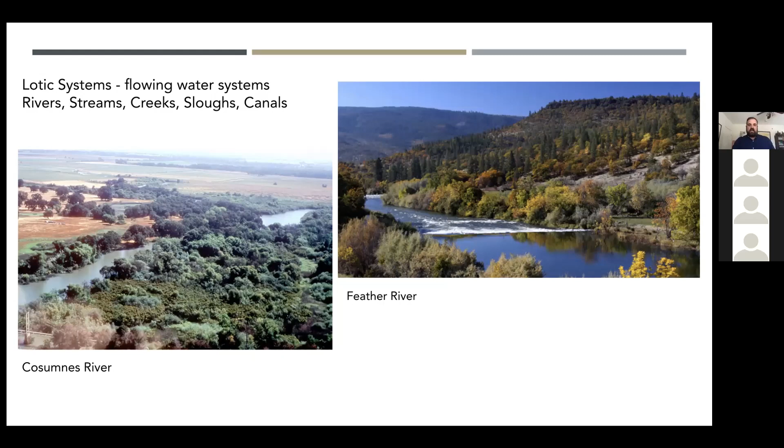The reason why that's important is as you have these different rivers flowing, your parameters may be a lot different. So just understanding the water tends to be cleaner up in the headwaters, and then becomes more turbid and slower, with a lot more suspended particulates in the actual river or creek. So even a canal or a ditch is still considered lotic because the water flows. A lot of people that work in this industry would be dealing with those as well.

A lentic system is typically something that doesn't have any flowing water - still water, like Lake Tahoe, reservoirs, ponds, marshes, things that don't flow.

The issue with those when it comes to water quality is if they are receiving a bunch of nutrients, they can become eutrophic and change the water quality from a low nutrient, or oligotrophic, system into a eutrophic system, which is a heavy loaded area that can actually become very toxic. I believe there's a lake up in Northern California called Clear Lake that gets so much nutrient load it becomes really the not-so-clear lake because of all the nutrients. So these systems act differently.

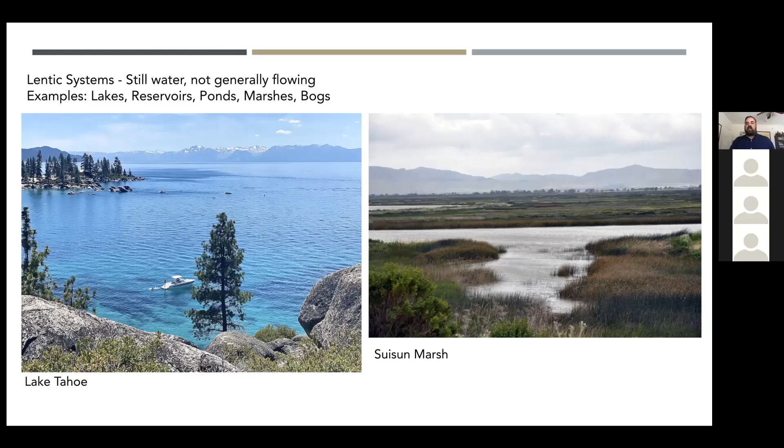If you have a marsh and you're trying to work through that, and turbidity, and you're disturbing the soil there, the turbidity is not going to flow away like, say, in a moving creek or river. So, like I said in the beginning, we wanted to make sure.

I wanted to highlight some of the wildlife that occurs there, especially some that are sensitive. So this right here is the steelhead trout. It's a species of special concern. Some runs of them are actually endangered. These white lips are the main feature, that's how you can really tell it's a steelhead trout. So they are a salmon, actually in the Salmonidae family, but those white lips really give it away. And they're in these rivers and streams, and they do spawning.

So the steelhead trout, for those who don't know, are anadromous fish, just like a Chinook salmon or a king salmon. They're born in the headwaters and rivers and creeks, and then they flow out to the ocean as they get larger and have the opportunity. They get very large and come up the rivers again and breed, and can live their lives. So it's basically a rainbow trout that is adapted to go back and forth into salt water, and they can actually go back and forth several times. They're not necessarily like a Chinook salmon, where breeding is the end of their life cycle.

For these guys it's important to have high water quality for spawning, and also temperature. So temperature, pH, these different parameters could affect the eggs when they're breeding.

Our largest native frog, the California red-legged frog, another species listed as threatened on the federal and endangered species list. What's important for water quality for these guys is amphibians are highly sensitive to toxins in the water because they actually absorb all their nutrients and water through their skin. So amphibians don't drink any water, they just absorb everything through their skin. So if there's any toxins, or if pH changes to acidic or too basic, you can have a lot of issues, and the populations of these species will diminish.

And then the foothill yellow-legged frog, which is found in the headwaters of the Yuba River and the Feather River in the Sierras, has just been listed on the state endangered species list, and they need very clear water. So affecting the water with turbidity or changing the water chemistry could really affect these populations.

Coupled with a lot of the permits that people get for different projects or agencies, a lot of these animals are tied into that, for these reasons - because they're listed and sensitive, and so there's a lot of language in there.

Then going to the reptiles, the western pond turtle, another species of special concern, another sensitive species by the state. Certain populations of them are being reviewed as a candidate for endangered species status. So these guys have also been in decline.

And then of course you have the mammals - river otters and beavers that are kind of more on top of the food chain, which are really important for the health of our rivers and also indicators that the river has a nice food web there.

So I just wanted to make sure we talked about this, one of the big reasons why some of these permits exist - you have the 1600 permit from the California Department of Fish and Wildlife, or if there's an endangered species, the United States Fish and Wildlife Service, and if there are fish like the steelhead trout and salmon, you'll have NOAA's National Marine Fisheries Service involved with your permits. Understanding that they're important, these agencies exist to protect all of these species, and their goal is to help them recover.

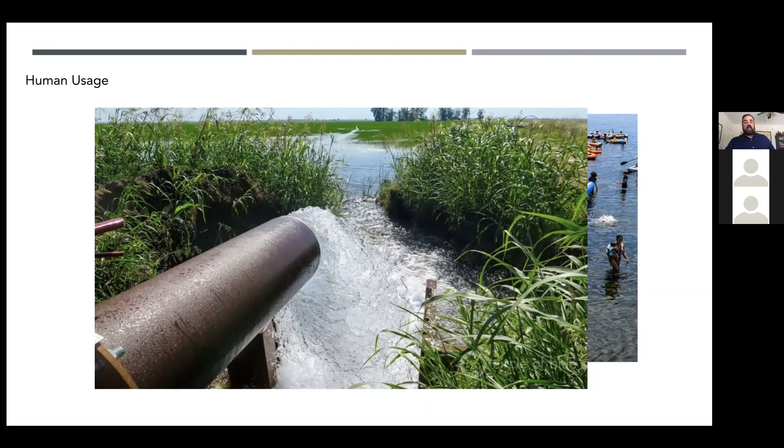Then, of course, agriculture. So this is a photo of a rice field being filled, because rice needs a lot of water during the summertime so that it can grow, a lot of sunlight, and we produce a lot of rice in California for the world. So it takes a lot of water.

So about 91% of wetlands in California have been lost or altered, due to draining, making aqueducts, channelization, and just draining for development. So we've lost a lot of that habitat.

And since we've lost that, that's why there's so many species tied to these wetland and riparian areas that are endangered. Losing 90% of your home range, these species and the whole system get into big trouble. And hence, that's why we have a lot of regulations to ensure that we are protecting our water resources, for drinking water and for wildlife and ecosystems.

Of course, that goes hand in hand. That is a big balance there.

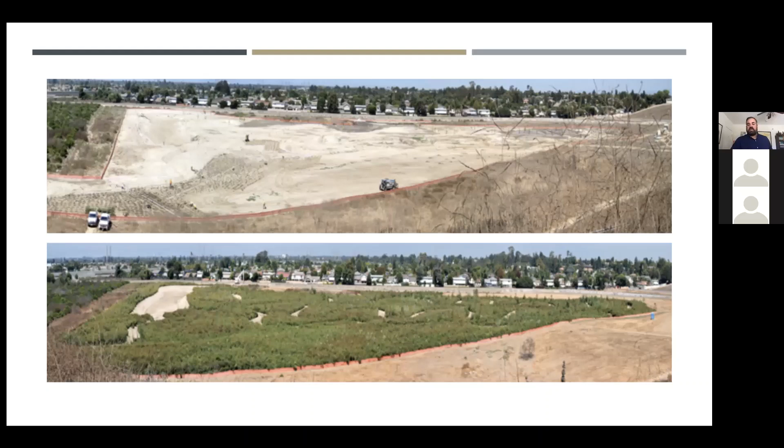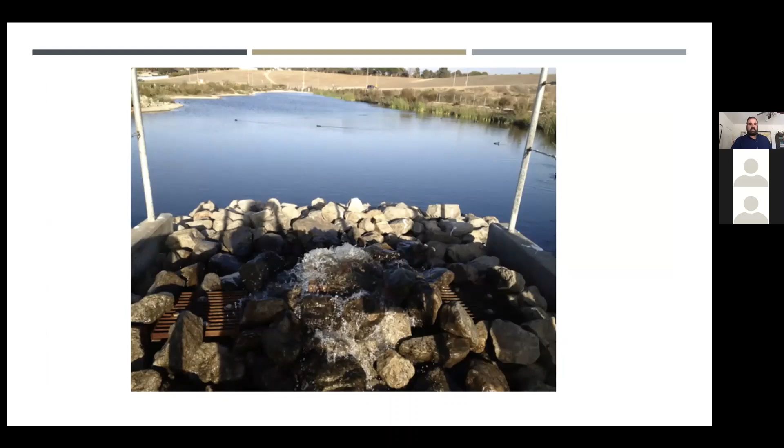So when we do construction of wetlands - thankfully this was the first project I ever did. Back when I started the company, I was a very confident 27-year-old who designed this, and I probably would do it a lot differently now, but I had the opportunity and still manage this project where it was just a dirt field, and we constructed 40 acres of wetland and riparian system down in Orange County. And this water is actually just urban runoff that we're utilizing into 6 acres of true wetland habitat.

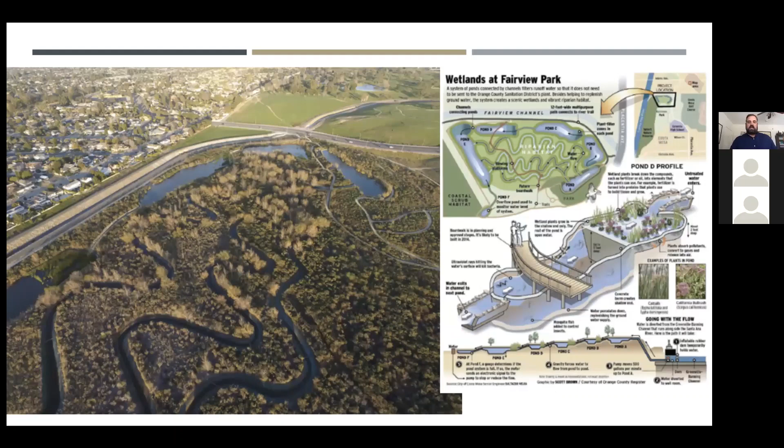And it filters down and goes back into the groundwater. So understanding these water resources, restoration, and manipulating them so that we can use them for agriculture, drinking water, recreation, and even restoration - it's all in this big cycle and balance. So that's the end of the wetlands component.

I wanted to make sure we talked about that, and then we'll talk about our in-water work and diversions for our projects. These projects are all transportation related, either through Caltrans or counties, bridge replacements or widening. So as we go through this, we'll show a few different diversions and how they actually regulate water quality.

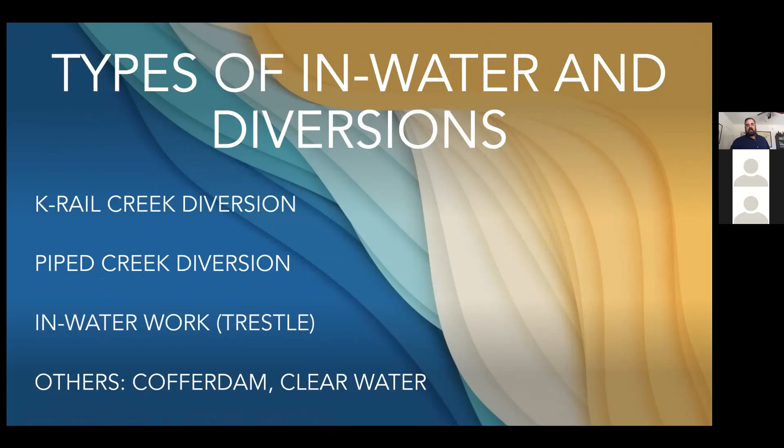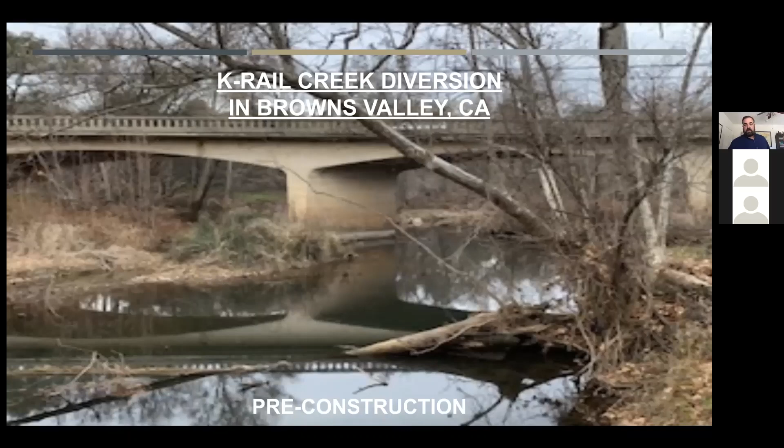So this is Dry Creek in Browns Valley up north, and this is Highway 20 - the Highway 20 bridge, and this bridge is going to be replaced. In order for them to do that, they needed to have a diversion in this creek to have access. However, there are steelhead and salmon known to be in this creek, so they have to allow fish passage throughout the life of this construction project.

So here's some different slides of putting the K-rail in. To be able to work for longer periods, they put in this permanent, semi-permanent structure, more of a hard structure since K-rail is very strong. We were able to put this into Dry Creek and temporarily narrow the passage to still allow for fish, then put native rock behind the K-rail and filled it.

As we were doing that, we were measuring the turbidity upstream and downstream of the system, and also ensuring that there was nothing, no debris or anything coming out of the site.

As we were putting the K-rail in, our biological team was seining out the wildlife that would be trapped by this K-rail barrier. On the left slide, it's not an excavator exactly, but it has a hook on it for putting these down. You can see there's a little path of water that wildlife can get blocked in, so we seined those out and removed some small fish, crayfish, and bullfrogs, which aren't really native, but it showed there was wildlife there.

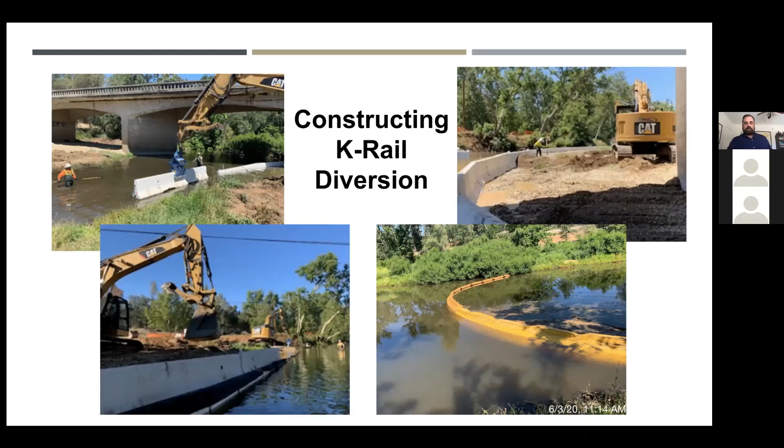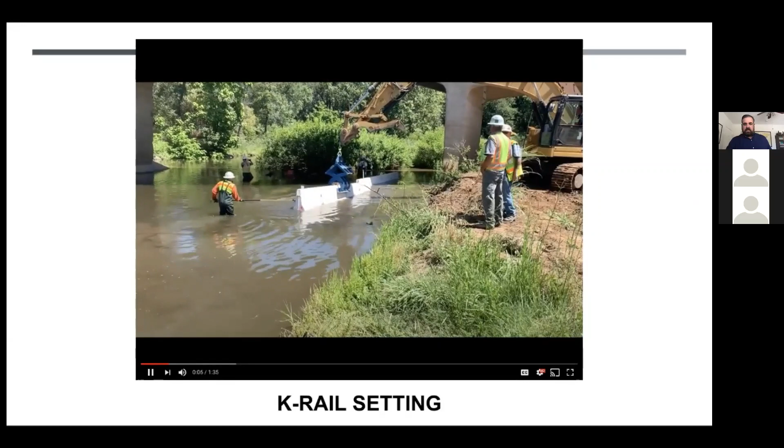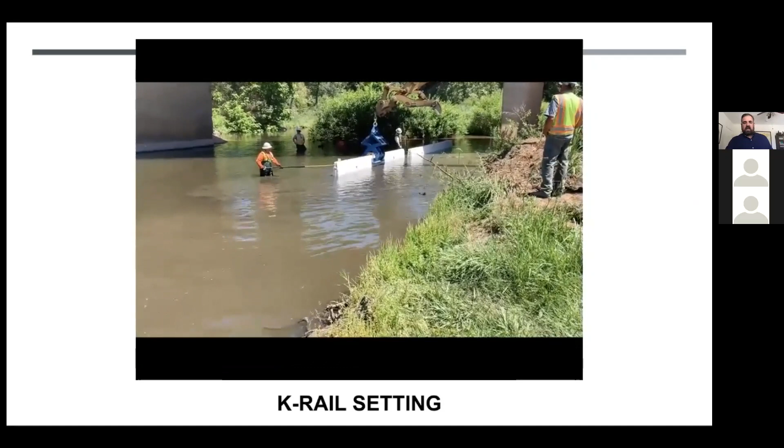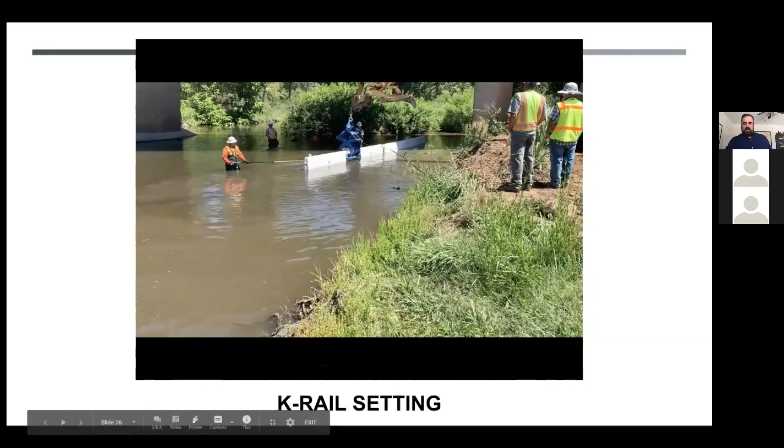So this is kind of like getting out of the way. Sampling. Wanted to show that, I don't think we have to watch the whole thing, just kind of know what's happening.

So this is kind of the finished product here. You still have this passage so fish and wildlife can move through the construction project, and there's still access here to build the new bridge coming out in the foreground of this photo. If we're looking at the bridge, that is upstream, and the viewpoint is downstream. The photo on the right is under the bridge looking downstream.

Water remains pretty clean, no erosion going through, and this also enables higher flows. It's not going to create any more erosion because the K-rails are a solid structure.

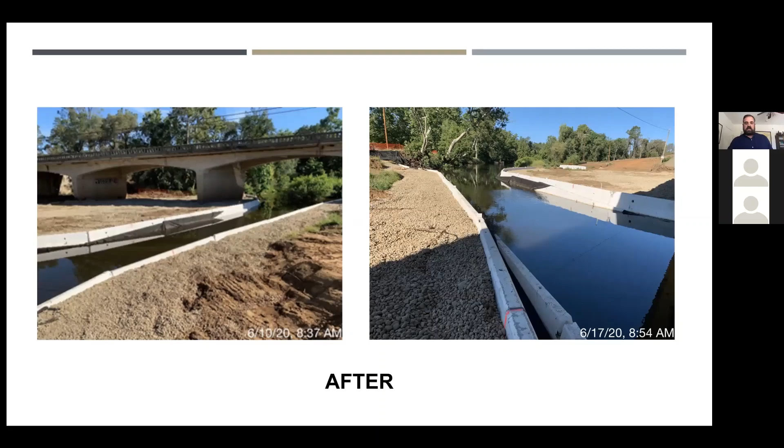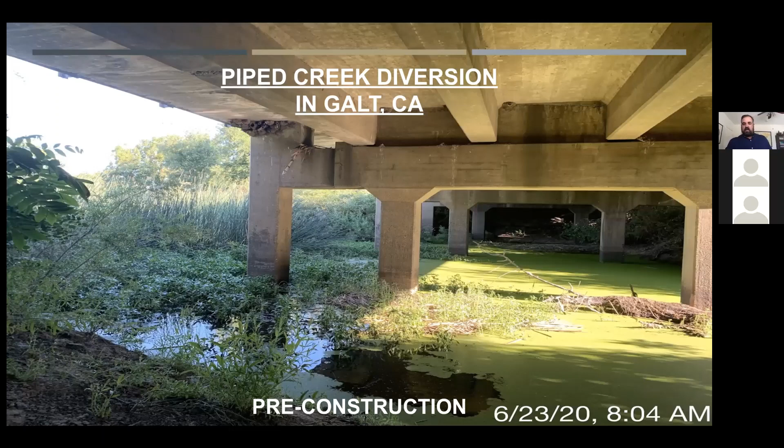This area actually didn't have a lot of flow - it was very, very low, if not any. However, it's still connected to irrigation, and even though this system isn't necessarily completely natural - I'd say Deep Creek, the last example, has a little bit more natural flow - the irrigation districts and farmers can really affect how the water flows, almost unseasonably.

So for this one, they used a black plastic pipe, about 12 or 14 inches, and put that in the creek, dewatered the area around it, removed any wildlife, and then it was buried there on the right.

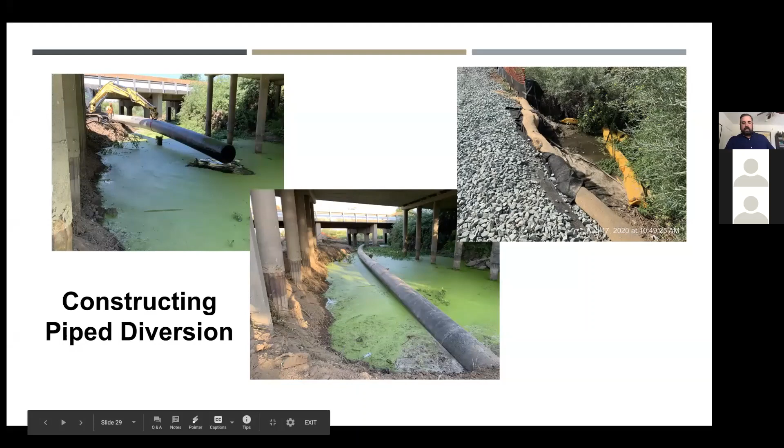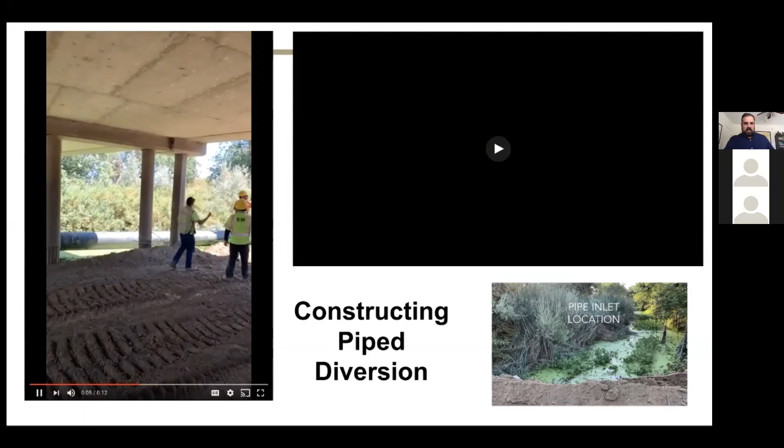I'll show you some videos here. Another one laid it in there.

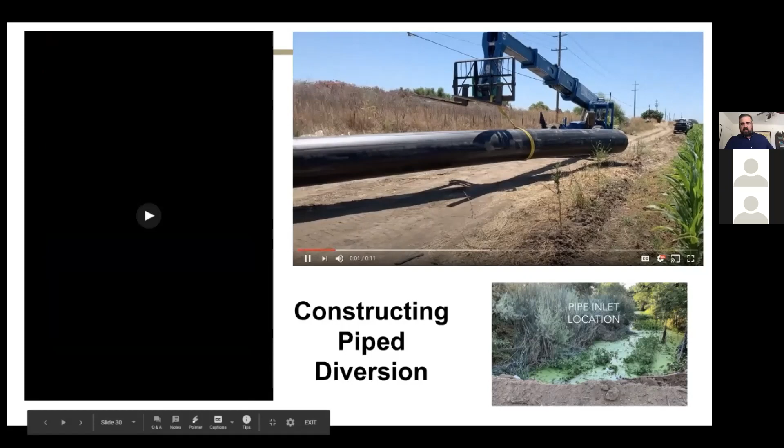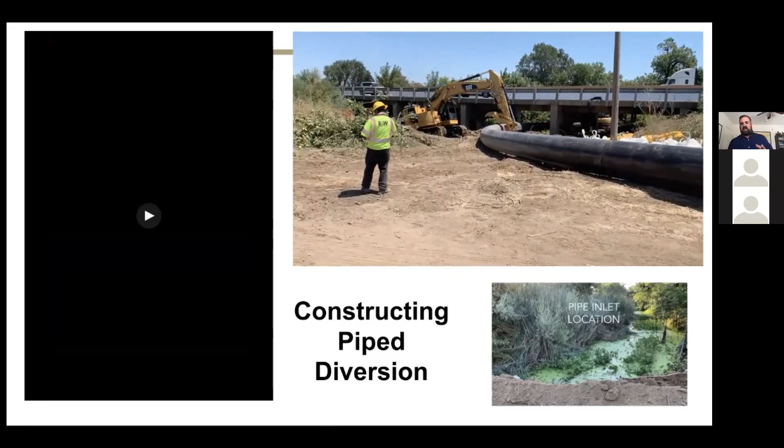The project is actually under Highway 99 - that was probably the northbound bridge there. Let me move this display. You can see this is the pipe inlet up here, down in the right corner, so this is the upstream component.

You can see the water is actually not really flowing, it's barely a trickle, but there are times when the irrigation from the upstream agricultural areas plays a larger role.

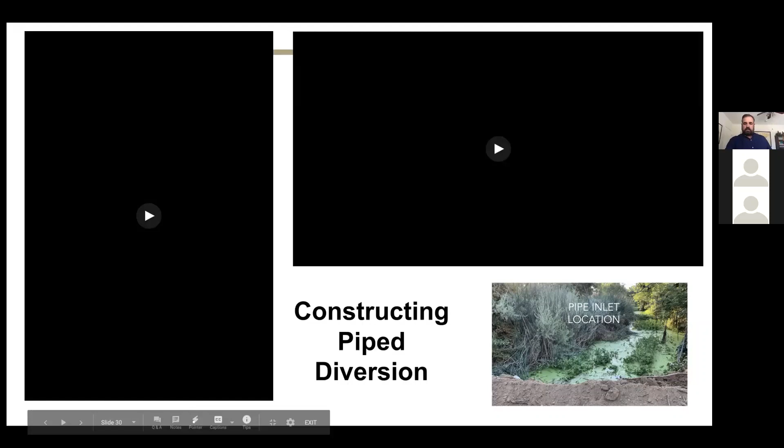This project has daily testing to ensure compliance during this rapid construction. In the Sacramento area, there's a lot of rivers and a lot of construction that is this rapid seasonal construction that has to be done before certain dates based on permits. It could be because of the flow of water, or in this case, the giant garter snake, which starts to go underground in October, so you really can't work past that date without the potential of impacting them during construction.

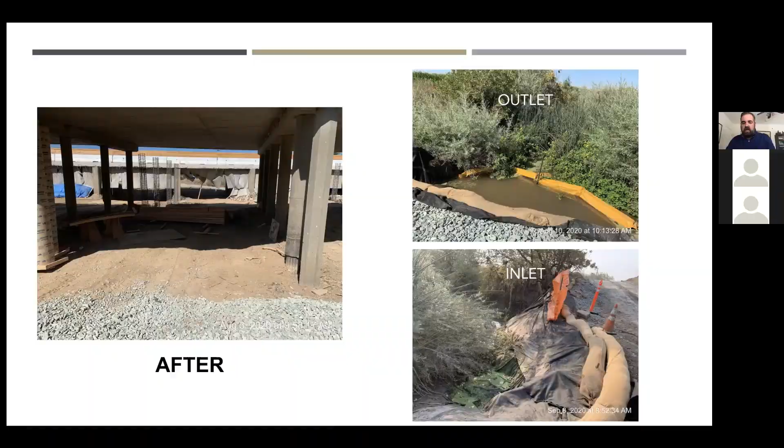So this third one, this in-water work here, is at the American River. The bridge is Highway 160. It's actually still connected with the Caltrans project 99. So it's interesting that there's one permit for two different locations and two different watersheds. I've never really seen that before. It's pretty interesting. So anyway, this is Highway 160, just north of Sacramento. Kind of, it's in Sacramento, but the north end.

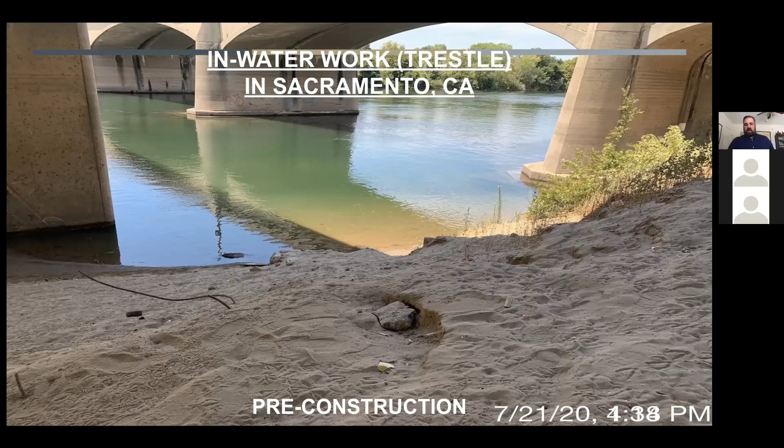American River, and it's a scouring project, so to protect against further scouring of the bridges here. So this work is all in-water work. So putting up the turbidity curtains, they're creating these coffer dams, dewatering, and then they're going to be pouring rock kind of around the pier walls here to ensure that to protect against further scouring.

So they had to build a trestle because you had to get to each pier wall to get this excavator out there, and then there was also barges and everything.

And so this river, you know, a lot of creeks and everything, when you're doing water testing, you can just kind of walk up or get like a long, you know, kind of a dip cup and just grab that water sample. Since this is a little bit bigger of a system, you know, you got to have a boat or different methods. So even if your boat breaks down or you don't have access, especially this year with COVID, it's even a bigger challenge.

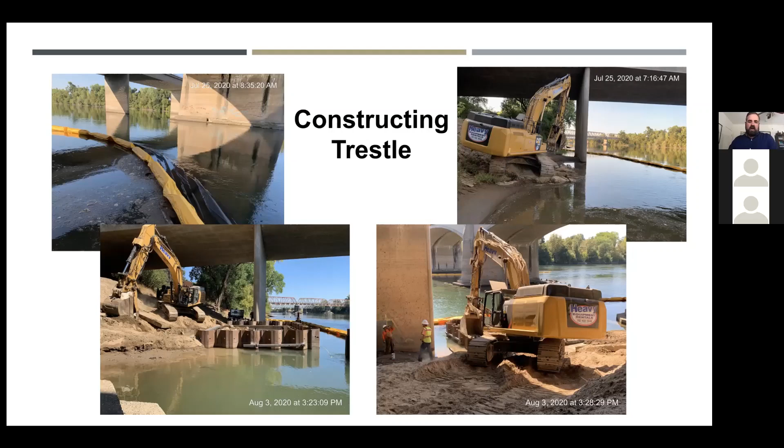And sometimes we utilize the watercraft that the general contractor already has on site. So due to COVID, we weren't allowed to do that without a little bit more testing and things, which could slow down the process since we have to be testing the water here on a daily basis. So we came up with different methods, which I'll talk about in a minute.

So here's the after of the trestle bridge here that they put in, and then you have these turbidity curtains to ensure that the project is minimizing that turbidity to the main river there.

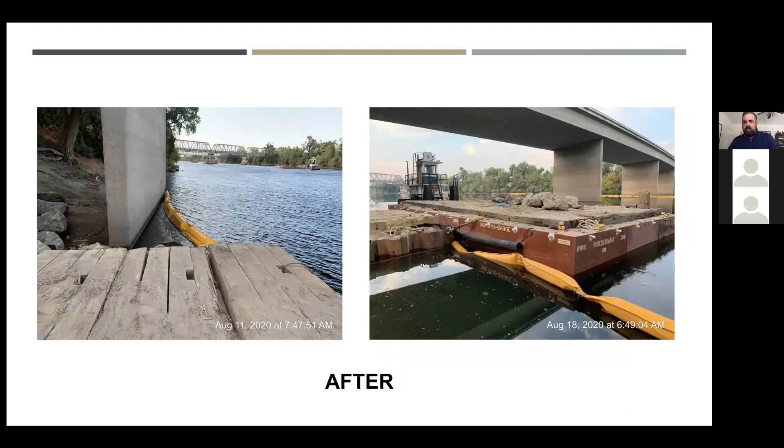So, you know, as you're doing in-water work, of course, sampling is a big part of that. Whenever diverting or just impacting the water within the water work, making a trestle bridge or whatever, we have to ensure that the turbidity isn't breaking any thresholds, and the pH, if there's any concrete work or anything else going into the water, isn't affected.

One other thing worth mentioning is dissolved oxygen, which is really important, especially with these rivers that have fish. When you have turbidity, it can block light, which could then affect the photosynthesis process, which could actually affect dissolved oxygen. In worst case scenarios, especially with heat waves that we've had this summer, you could actually experience fish kills, which obviously wouldn't be looking good for any project, whether it's related or not.

Nobody wants to see floating salmon or trout. So we had different methods here, at Dry Creek and the American River, just kind of showing different ways to do this.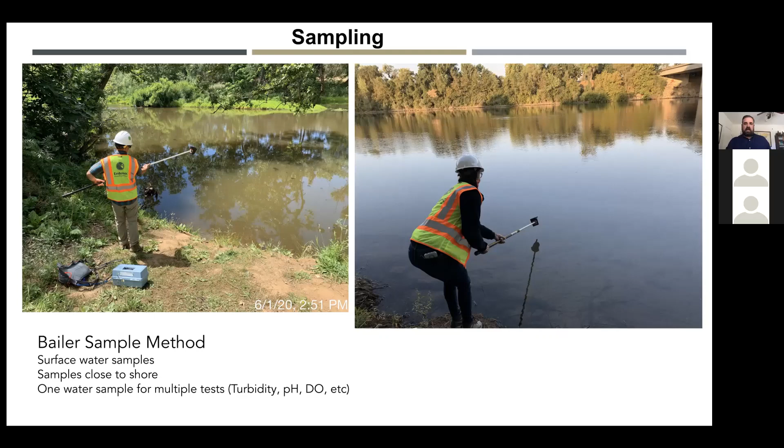So actually the fishing pole method, that was good, since Cheyenne here is a really good caster. She's getting great samples from the middle. So when we didn't have access to a boat from the contractor and our boat was being utilized in another area, we still wanted to make sure that we get our samples.

So I guess she could have gone out in an inner tube or something and floated out there and done it, but this is a way that has actually been quite effective to get these samples. So getting the turbidity and pH. Obviously in a sample like this, you can't really get an accurate dissolved oxygen measurement.

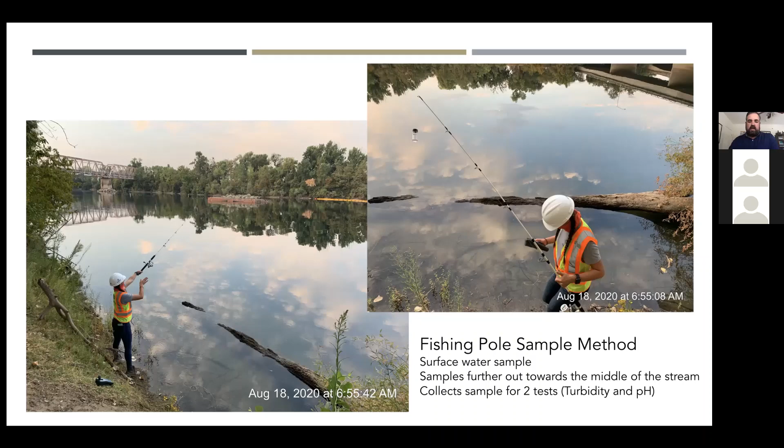That has to be done in the water with a probe. So then of course, when the boat is working or we do have access to it, you get out in the middle and make sure wherever the work is being done, you can get closer for more accurate samples of what's happening.

Also, in these bigger systems, when you're looking at this turbidity curtain, you can see that debris can really build up. And I think that's something to look out for.

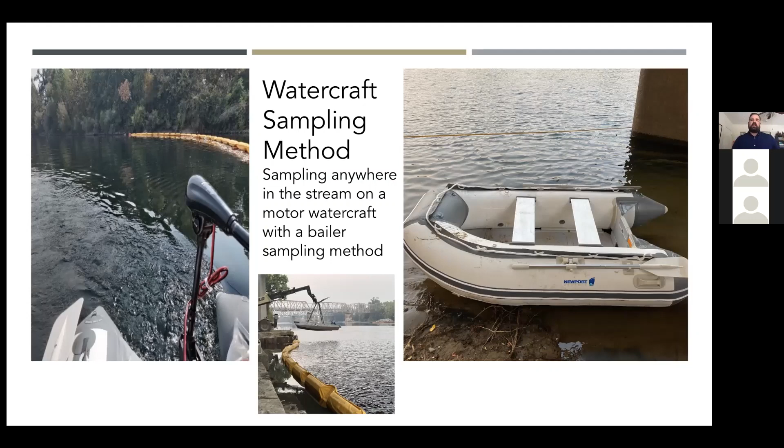Especially the American River has a lot of people using it. There's a homeless community there, and so there can be a lot of trash, and this thing is flowing all summer long. So you've got to watch this in case this is moved or anything, that it doesn't flow off the project site. It could be debris from the project as well.

So I kind of touched on a little bit of this. What is turbidity? The measure of turbidity is really the clarity of water in the NTU unit, which I'm sure all of you guys know. And from a biological component, it's extremely important because if water becomes too turbid and the system isn't supposed to be, it can really affect the species that are photosynthesizing. It can actually cause health issues.

So UV light kills coliform bacteria. So if that is being blocked by higher turbidity, you can actually get an increase in coliform bacteria, which can be an issue. If that's an issue, it becomes a health issue. It affects the people around it, off project, and it can be a news story that nobody wants to be a part of.

So along with it affecting the natural balance with the fish and amphibians and things that breathe underwater, it can also cause a health risk for people in drinking water.

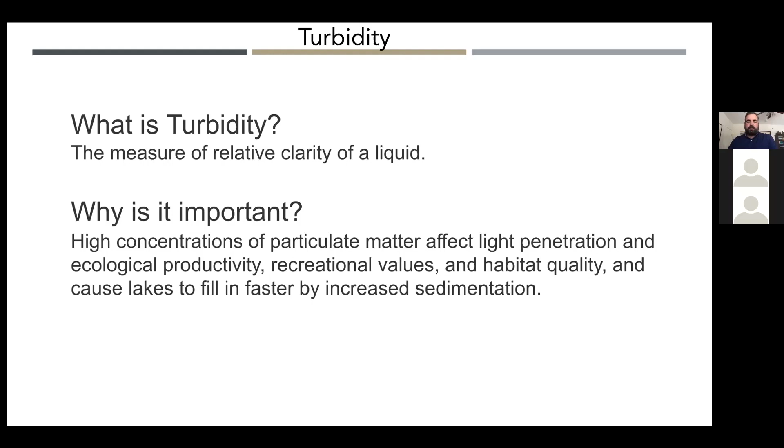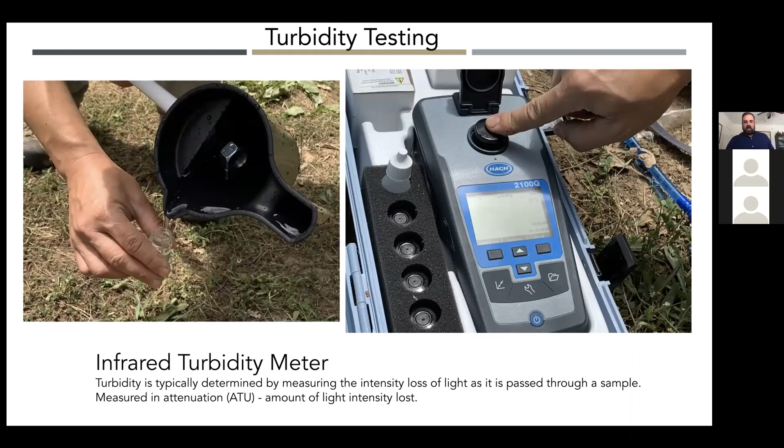So the samples, we're putting them in vials so that we can actually put them in the turbidity meter and ensure that we get an accurate reading, making sure that those readings are within the permit levels, so that they can continue working, or if there's an issue, we need to stop work and adjust or figure out what's going on.

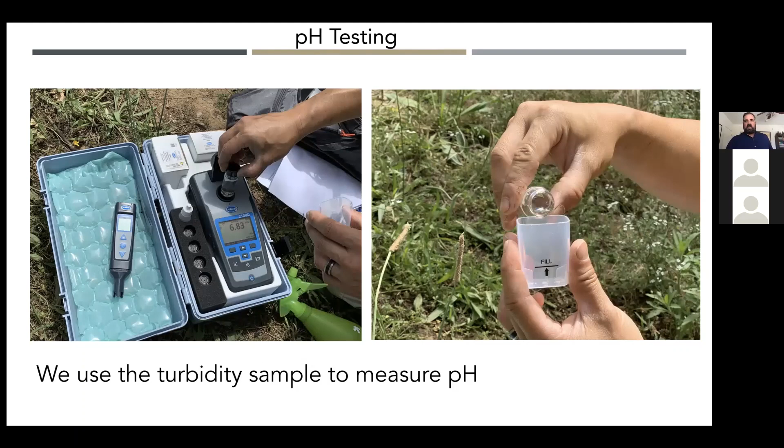So then you can also use that turbidity sample to measure pH. If it's going down, that's acidic, and if it's going up, it's basic. So if there's anything that could cause a change in pH, concrete, or if for some reason there's a bunch of surfactants or soap or something in the water, that could potentially change it as well.

So pH would be an indicator of certain chemicals in the water, like I was just talking about, and we don't want that to go too low or too high. pH is a measure of logarithmic units of hydrogen ions, either hydronium or hydroxide, depending on the concentration, which will tell you the pH number. So 10 to the power of negative 7 would be neutral, of course, and I know you guys all kind of know that.

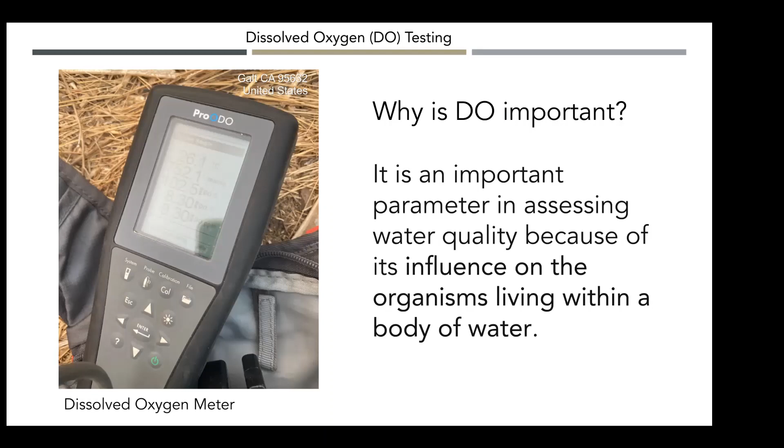So dissolved oxygen, I kind of mentioned that earlier as well. It's an important parameter because of how it influences aquatic wildlife. At this time of year, if there are small ponds or shallow water and it gets really hot, there are natural fish kills that happen. So with that already naturally happening, we could tip the scale if it's almost there, if for some reason turbidity is high, or we're impacting these water resources in a way that could exacerbate the situation.

Another area, obviously for water quality, you want to consider the surrounding areas, especially in the Sacramento Valley. There's a lot of agriculture, which means you're going to have different fluxes of water flows. There could obviously be chemicals in it, pesticides and whatnot.

These chemicals could also come from recreation, like oil slicks from 2-cycle engines and things like that, and from the larger river systems. Roads, of course, if there's car accidents and there's oil spills, or a truck spills some chemicals, that could all be washed into the area.

And then, of course, this year, for pretty much everybody in California, we've experienced a lot of smoke and fires, which, you know, we had internal discussions on how that ash affects the water and the water chemistry. My guess is since ash is used to make soap in an old way, it makes the pH kind of increase.

And then we had a team meeting with our fisheries biologist to see how that would affect salmon or anything like that, will we see any fish kills? So anyway, there's outer influences outside of our control that we just consider, because if all these things were happening, we still want to determine if we observe something occurring with water chemistry at the project site, whether it could be from other resources and not just from the project.

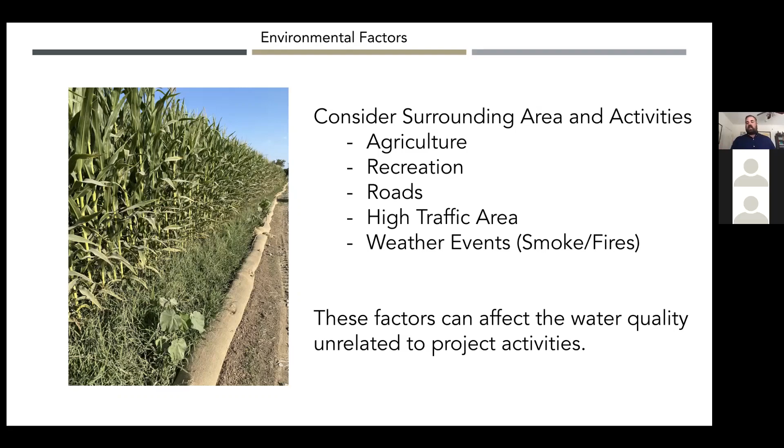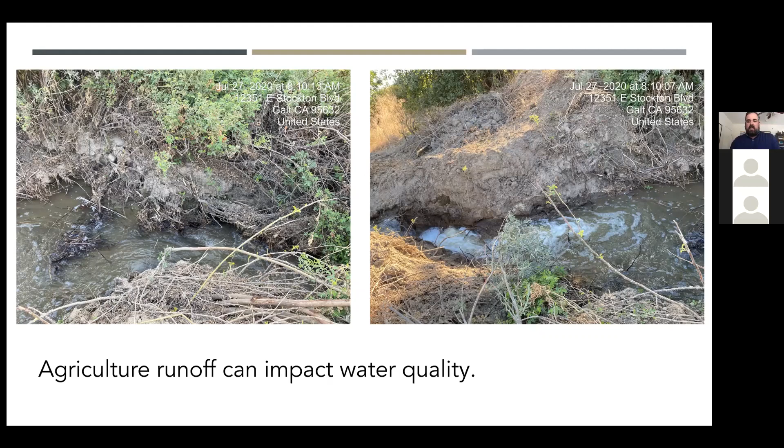Who knows if there's something in there like an oil spill a few inches down that then gets released. So that obviously can impact your site.

I'm sure a lot of you who work in the field know human activity can affect a lot of sites, from people just stealing stuff or breaking things for no reason or dumping things. So that obviously can impact water quality and the progress of the project. And actually, as a secondary thing, it could increase the work you have to do, which could increase the stress on the project as well, because of human activity like homeless encampments and everything.

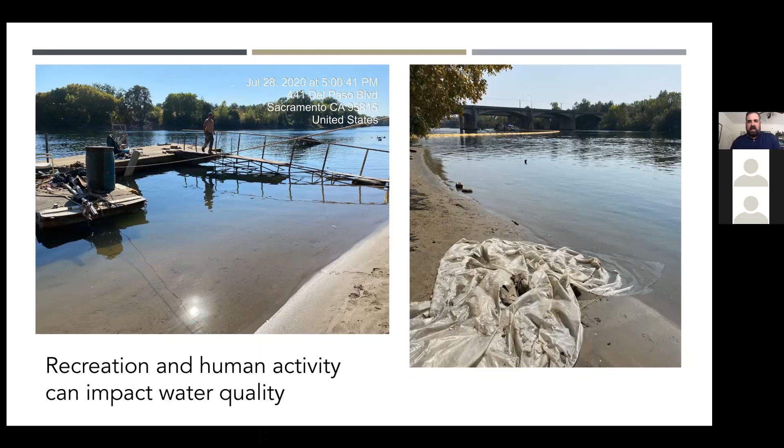And like I said, California wildfires, the ash, the poor air quality, of course that's going to impact water quality. And we did notice there was a slight shift - still within the parameters, but we were noticing shifts in our metrics there. We're assuming it was due to the ash, so we'd have to investigate a little bit further, but from our observations we did at least see a change.

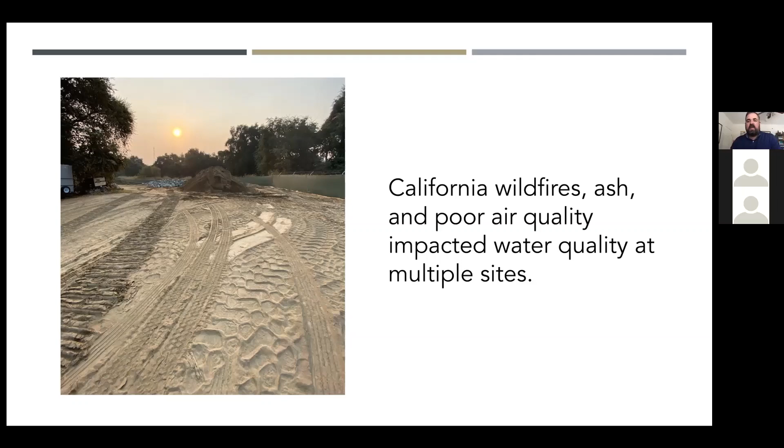So this is kind of the end of our presentation. I just wanted to make sure that we covered wetlands and the in-water work that we did this summer, and how that affects the water and our project. So it's always important to have fun, but in a safe way, and make sure that you're doing everything you can to protect the water resources out there.